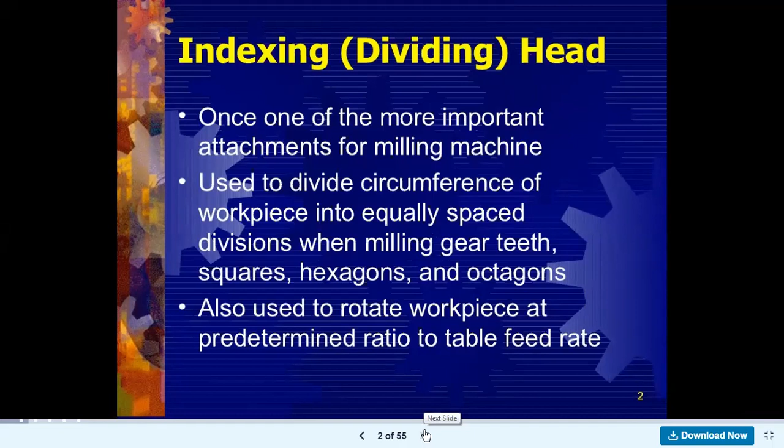So this indexing head or dividing head is mostly used for manufacturing or machining the gears. Correct, in equal spacing I need to rotate the workpiece, as well as I have to machine the spur gear on spherical shape when my gear is to be produced.

So these are the number of parts of this index head, the parts of dividing head. That is a foot stock called as foot stock at one end. Then there is a center rest for support there, and this is a headstock, just like your lathe machine headstock, for mounting the workpiece while doing the gear machining.

And this circular plate is called the index plate, and this pin is called the index pin. So that index pin can be rotated in that center part, where the index plate is fixed, and it can be moved in that circular manner for indexing.

So particularly I can index one hole at a time. So at the time I need to move that workpiece to a particular position, I can move that workpiece and perform that machining. So these are the index head parts.

Swivel block, spindle is there, worm is there, direct indexing plate is there. So these are the number of parts of this index head. Now this is one schematic diagram of that index head part.

So these are the number of parts. This is the index plate, or circular plate, that is the index plate having number of holes. Then there is a sector arm, used while selecting a particular hole, to position the index plate at a particular point. There is a sector arm at the vertical side also. There are two sector arms for positioning.

So in the next part, this is your section view of a dividing head, showing how you are going to use this index pin. At a time when I use the index pin, I can point to a particular hole with the help of the sector arm, so that one particular hole can be selected, allowing me to place the workpiece at that particular position so that the area will be machined with the help of the machining tool on the milling machine.

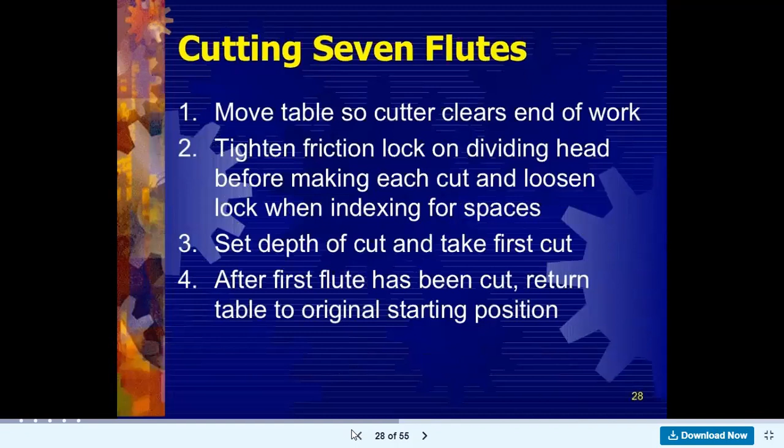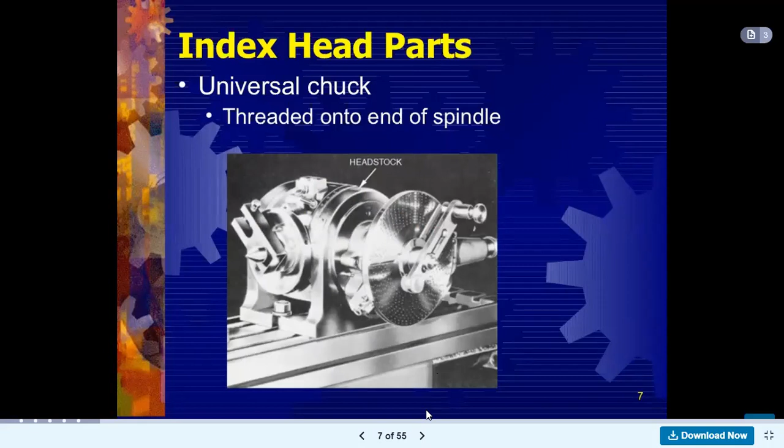So these index head parts are shown in the section view of this machine. Then another set of index head parts: in the universal machine there is a universal chuck, a head stock for mounting the workpiece, index head parts with a number of components, and a foot stock. These are again divided into several parts.

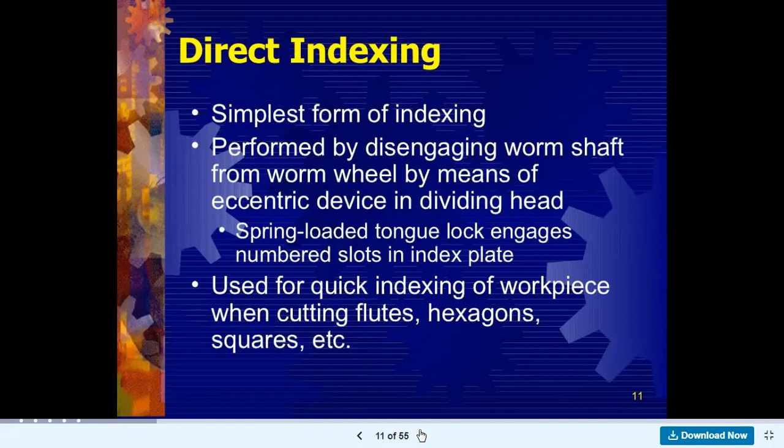So that is your direct type of indexing, one of the simplest forms. The direct indexing plate usually contains three sets of hole circles - these are the three sets of hole circles on that direct indexing plate. There are 24 holes, 30 holes, and 36 holes in that particular direct indexing division. So in that one single plate, these are the number of holes on the circumferential part of that direct indexing plate.

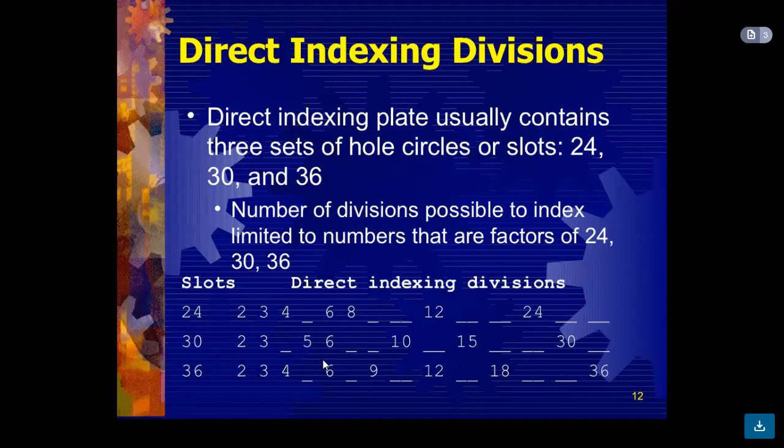So next is the example of this direct indexing. We'll have one more lecture on this indexing part next time, so that we can cover examples of direct indexing and how we are going to select this particular indexing. So this is one example of direct indexing.

What direct indexing is necessary to mill: 8 flutes on a reamer blank, or machining is to be done. So in that way I can select that 8 number of holes - 8 number of holes that I have to select with that indexing pin. The index pin should never count the hole or slot in which the indexing pin is engaged.

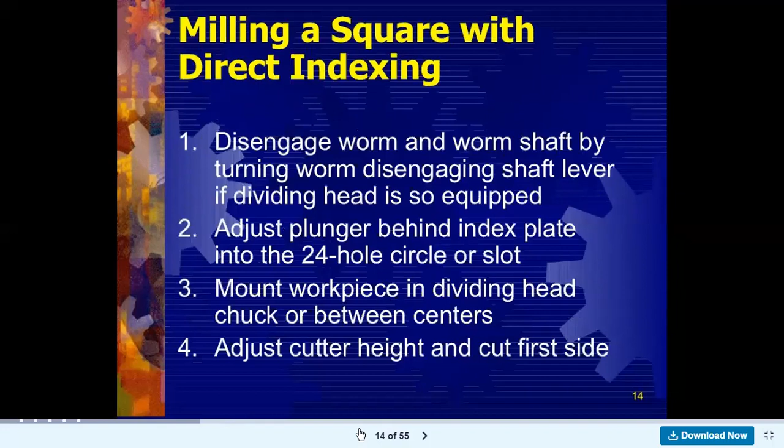So this is direct indexing, and then another part is called simple indexing. As we saw in direct indexing, there were 24, 30 and 36 holes. Just a minute, let's revise: in direct indexing there are 3 types of holes - 24, 30 and 36 holes on that index plate. But in simple indexing, the worm wheel has 40 teeth, or that is a 1:40 ratio only on that simple indexing. Work position is controlled by means of a crank, index plate and sector arm - this simple indexing is called having a gear teeth ratio of 40:1, because that worm wheel has 40 teeth on its circumference. That is your simple indexing.

So while calculating the indexing, or number of turns of the crank for most divisions, simply divide by 40, as there are 40 teeth on that mechanism.

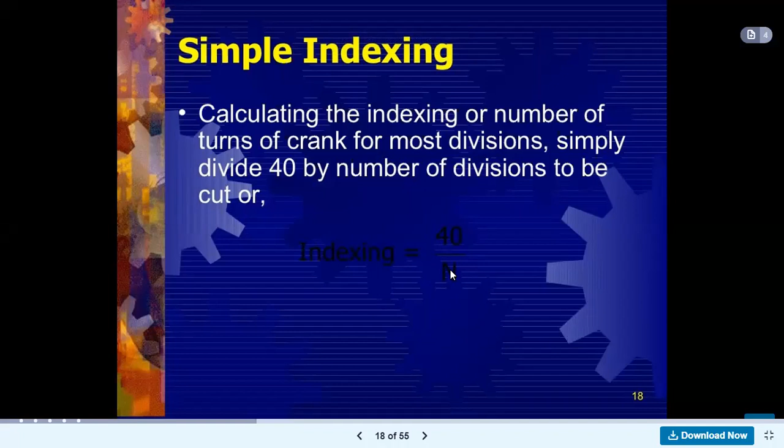Hello student. So this is one part of simple indexing. In that you can calculate the indexing or number of turns by simple calculation of 40 divided by n, as there are 40 divisions. So the number of divisions to be cut can be calculated in simple indexing by: indexing equals 40 upon n, where n is the number of divisions. Depending on how many divisions you need to cut, you can use that formula 40 divided by n.

So simple indexing is when, for example, I need 8 cuts - 8 number of divisions - then 40 divided by 8, so 5 full turns of the index crank.

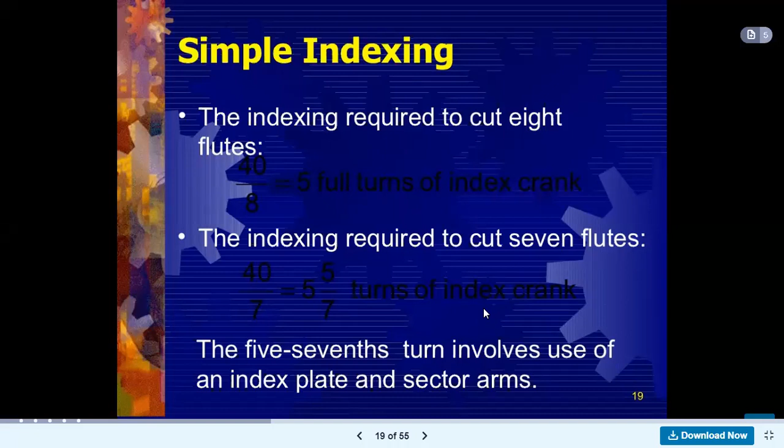Suppose the index required is 7 flutes, I have to make 7 flutes. So 40 divided by 7, that comes to 5 into 5 by 7. So 5 into 5 by 7 turns of index crank. So in that way we can have that index crank, simple indexing. Then

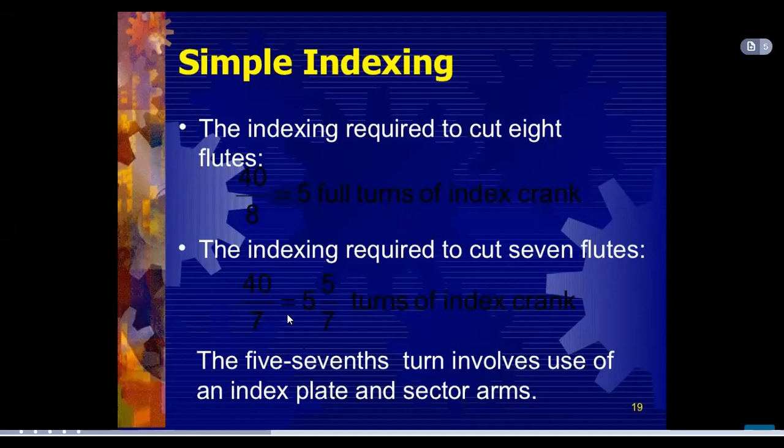Index plate and sector arm. What is that sector arm? We saw it in the drawing. That index plate is a circular plate provided with a series of equally spaced holes. The number of holes are there, they are equally spaced holes with which index crank pin engages. So sector arm is fit on front of plate and may be set to any portion of the complete turn. So that is the sector arm is there for

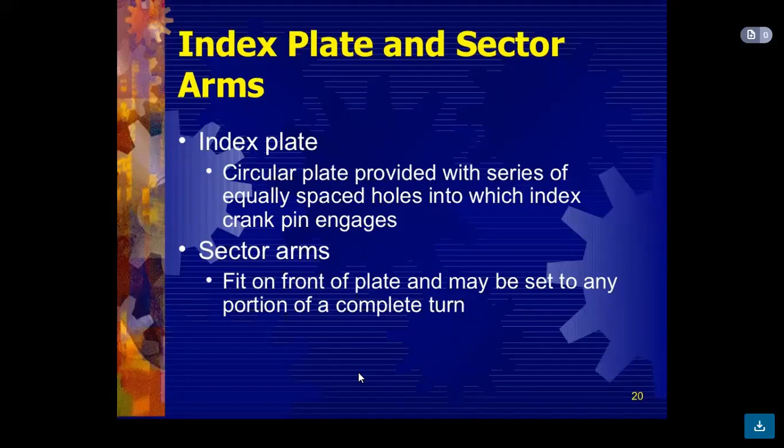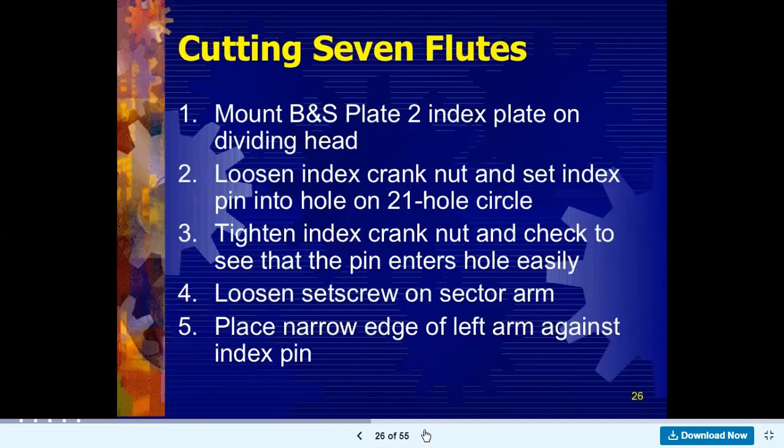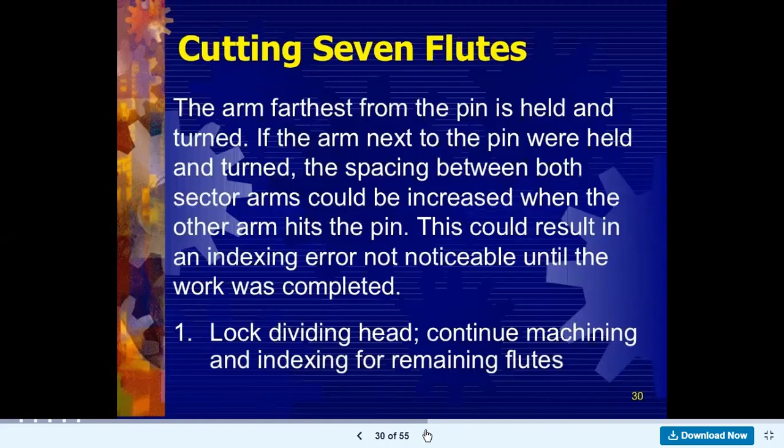That part we will study in detail in next lecture. Today we must understand what is that indexing exactly. So cutting 7 flutes, one by one we have to go the number of steps so that you can index the particular 7 flutes on that circumference of the gear. So then after direct indexing, there is simple indexing, and third type of indexing is called angular indexing.

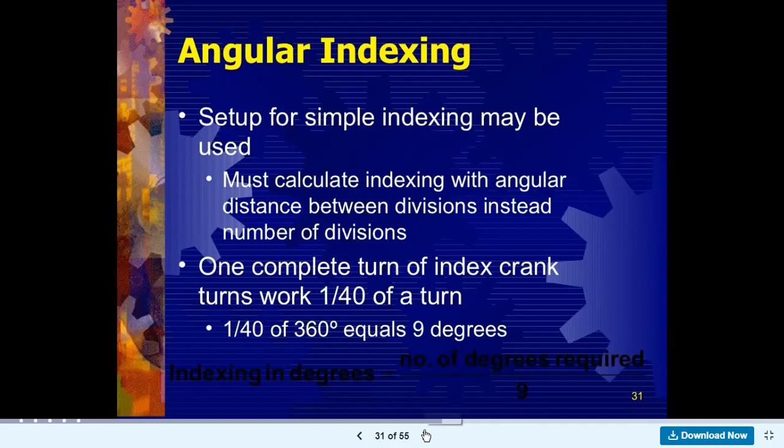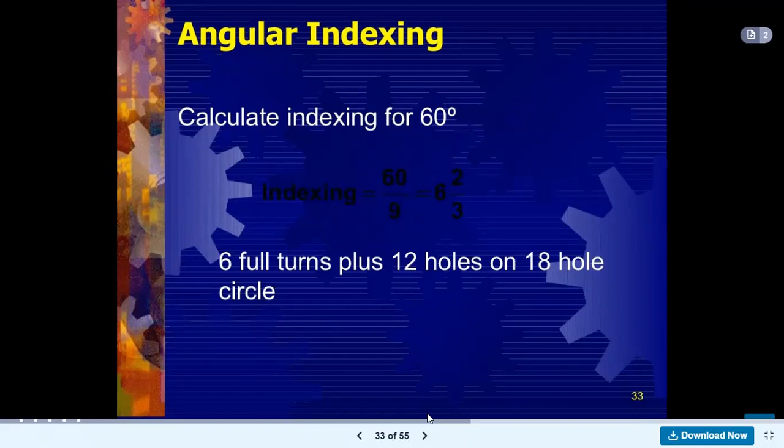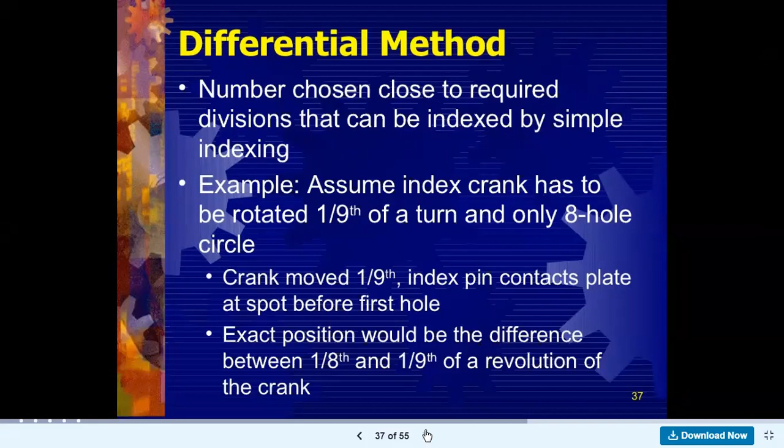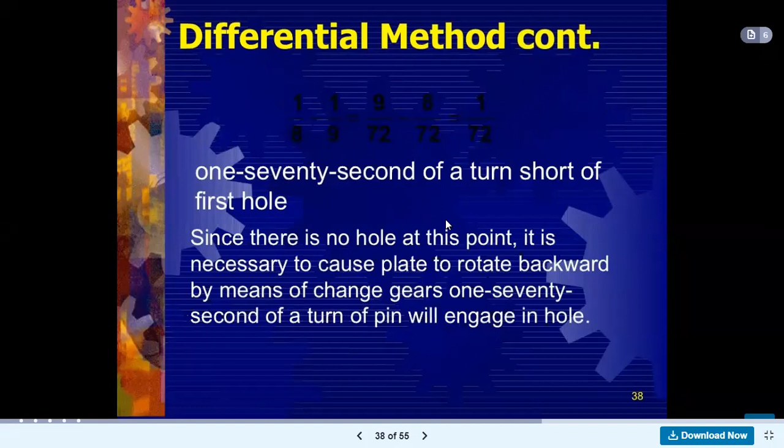Then second is simple indexing. Third we saw angular indexing, and there is fourth method of indexing, that is called the differential method of indexing. So differential method of indexing is one of the further advancements in that indexing method. So in that differential method indexing we can have that particular arrangement of indexing plate and indexing. So this is the method of calculating the change gears.

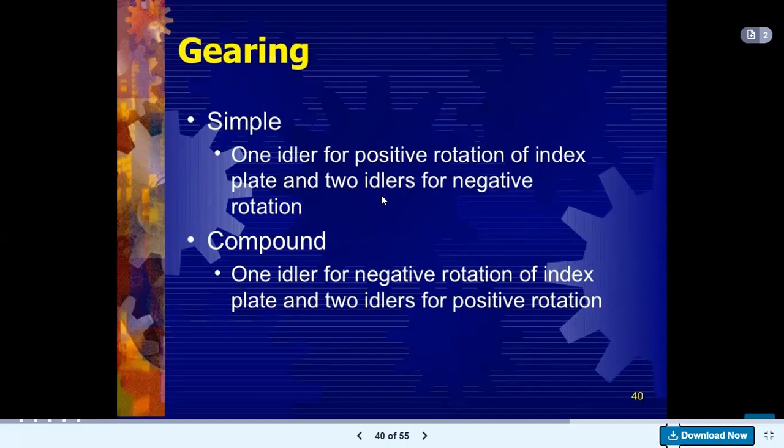When I use this dividing head, number of holes is given. So calculating the indexing and change gears required for 57 divisions. So what is the nearby number to 57? The number of holes is 56 holes. So in that way we can have that number of plate.

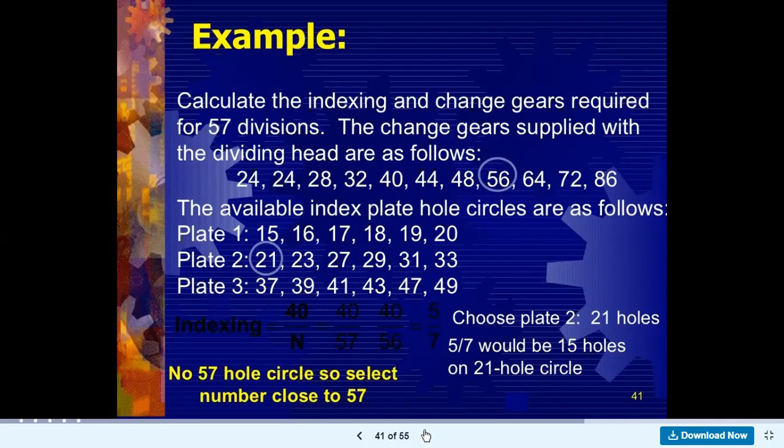So in that way you can have this calculation. This calculation part is an important part for us, because in your offline question paper that type of question is asked for 4 or 8 marks.

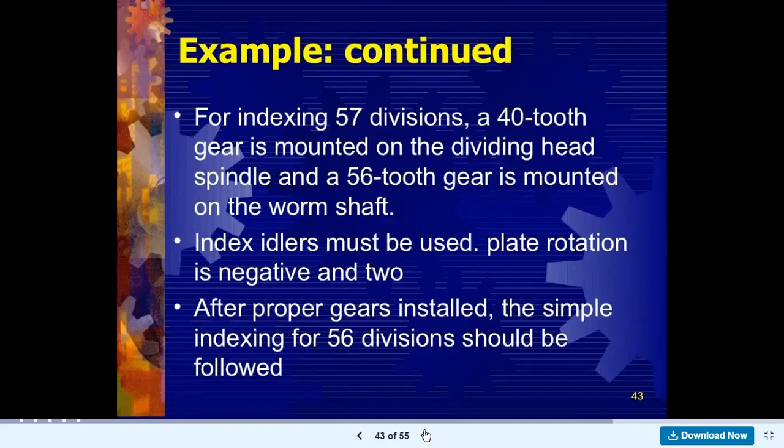So then, further, there is a wide range of dividing heads. So this is your particular dividing head mechanism. A is the large index plate, B is the crank, there is the crank pin, C is the small index plate. There are a number of index plates, small index plate and large index plate. This is the large index plate, on the bigger side, and there is one more attachment, the small index plate, here. Then this is called the gear housing of that milling mechanism.

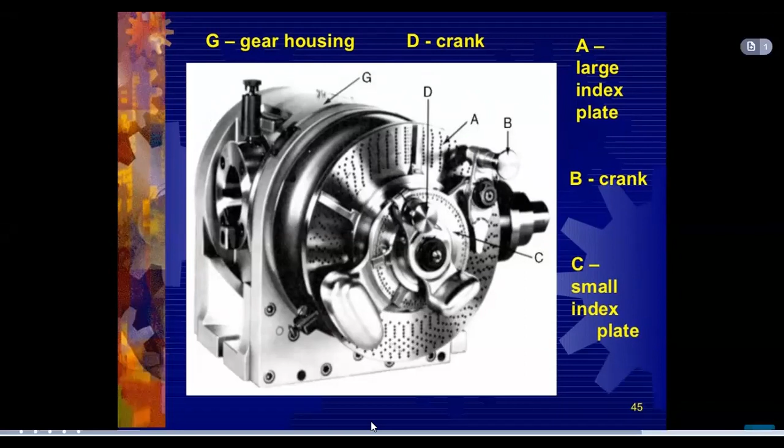Okay, so just try to understand this part. So this is your dividing head mechanism, also called a universal dividing head, or an indexing head. So indexing of our divisions.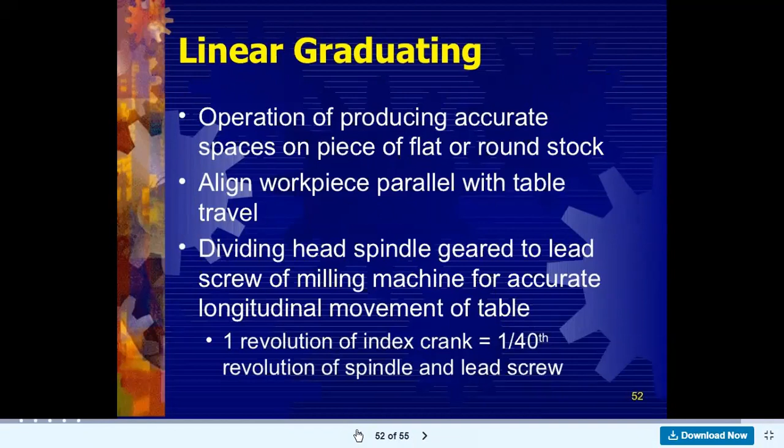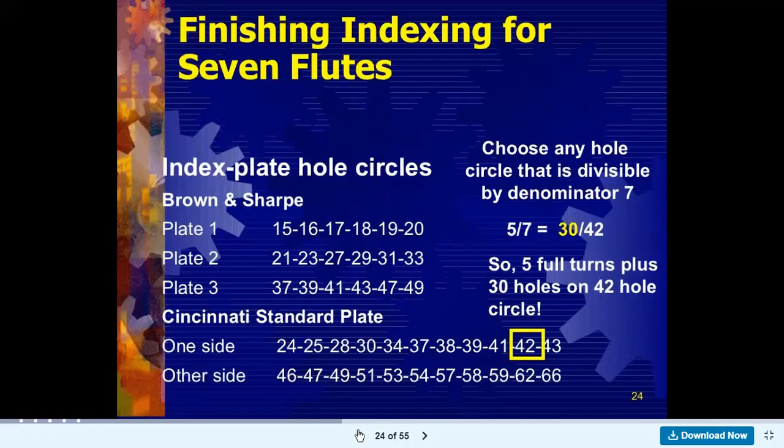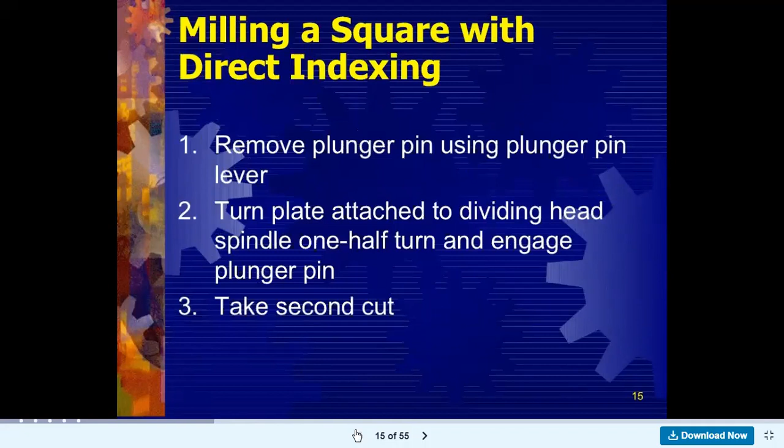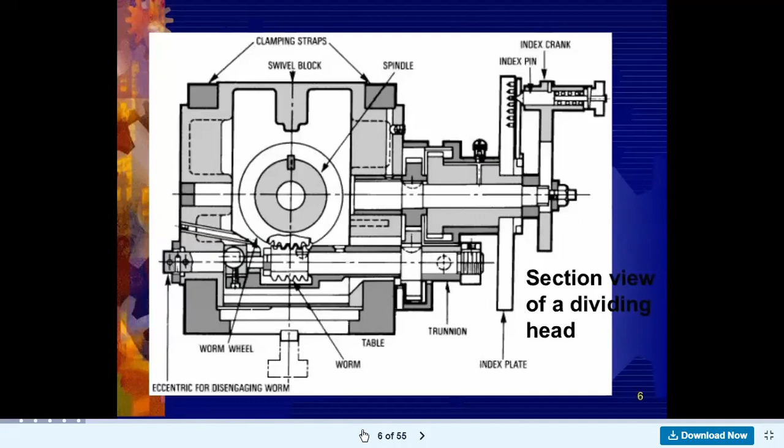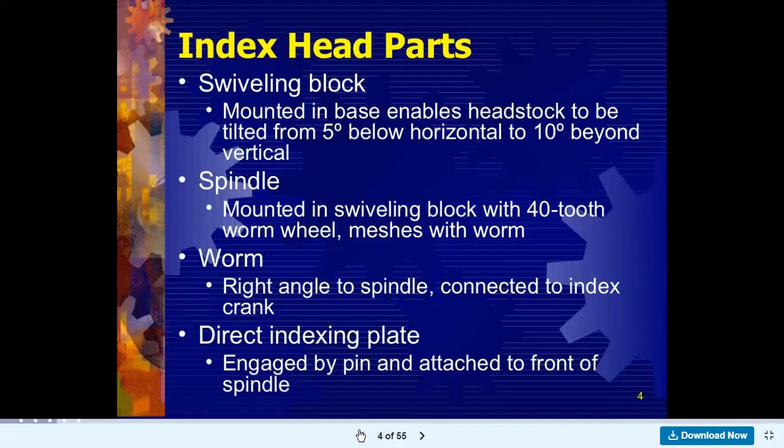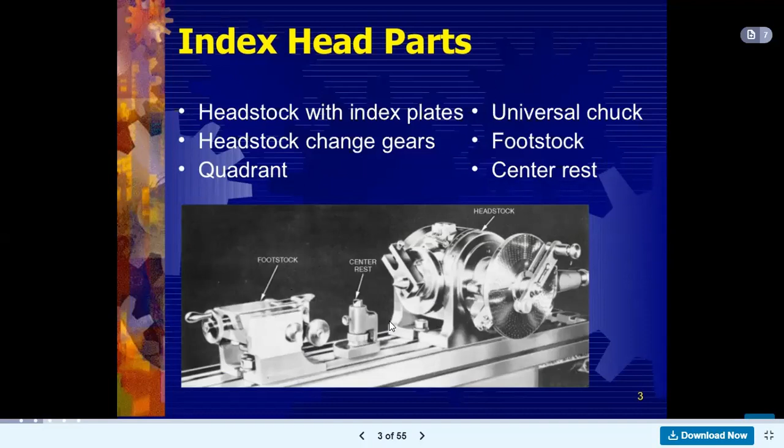So these are your index head parts. This is a cross section of that dividing head. So these are the index head parts. These are the number of parts of your index head mechanism. Foot stock is there, center rest is there, head stock is there, and this complete attachment is called the indexing head mechanism, or the dividing head mechanism. So indexing head, also called a dividing head.